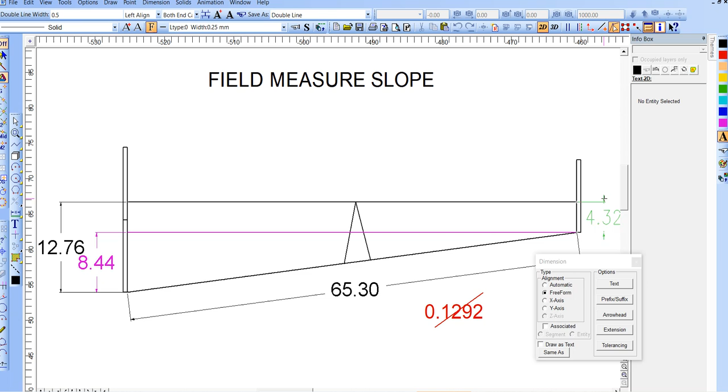This video is gonna show you how to measure slopes. Typically, you're gonna set up a builder's level. You'll put a Philadelphia rod here and a Philadelphia rod here, so you can measure the difference, right? For example, so ultimately, we're looking for this angle right here. Right, and we're going to be looking for it in slope, not degrees, maybe.

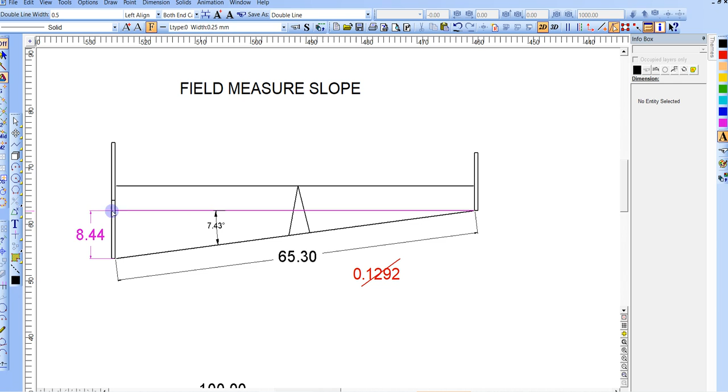All right, so you're going to have a Philadelphia rod measurement there and there. You're going to subtract them, and that's going to give you the 8.44. So this minus this will give you this. Those kind of go away. They'll be in your book, but they go away. And now you have the rise and the diagonal. To get the slope, you need the rise divided by the horizontal. But rise divided by the run, not the rise divided by the diagonal.

So if you do that, the rise divided by the diagonal, you'll get 12.92%. That is not a correct answer. Not far off. For most dirt work, it's going to be fine. But to get an accurate slope, you're going to want to take the rise, which is 8.44, divided by the horizontal. So to get the horizontal, you're going to go square root,

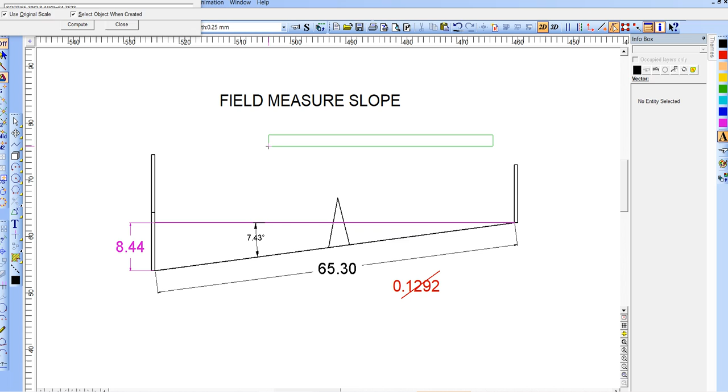open parenthesis, 65.30 squared minus 8.44 squared, close parenthesis. That will give us, I did something wrong, square root, open, 65.30 squared minus 8.44 squared, close parenthesis. Copy that. And then Control V equals, all right, that'll give you this horizontal here.

Now you can do the slope. So 8.44 divided by, Control C, compute, Control V equals, Control C. All right, that's how you get that slope. The proper slope is 13.03. That is a good one. This is not. It's not a huge difference though. It's looking like 13.03, almost a tenth of a degree, which for dirt work is going to be close enough.

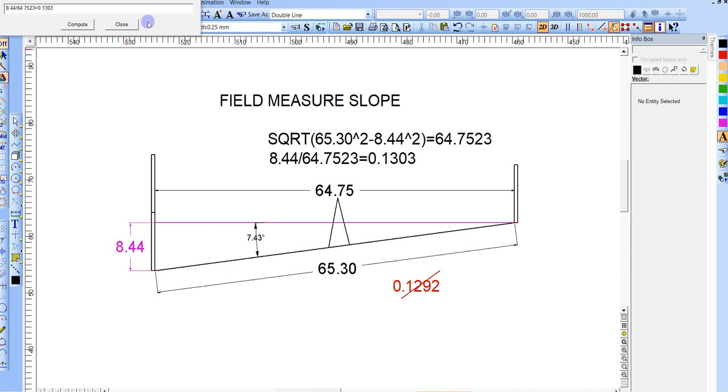So let's look at this then. All right, so that's one way. Here's another way. I was just explaining so I'll do that again, trim that out. All right.

So this is kind of an arbitrary location, so we don't know the distance between this, right? We just have a line right here that we know is at 225 feet. And we're going to plumb down here, because this is where we want to know from this point to this point, what's the slope? So to do that, we're looking for this triangle here, right? So we know the diagonal. That's something that we can field measure.

We have this line here that's 225 feet. We're going to plumb up H, V. So when you make your measurement, you want it to be plumb, right? We come up with 18.56 and 3.48. So to do the subtraction again, 18.56 minus 3.48, and you'll get 15.08. So that's the number we're looking for. Get rid of this, get rid of that. Those are in your book. And that line's not really relevant anymore.

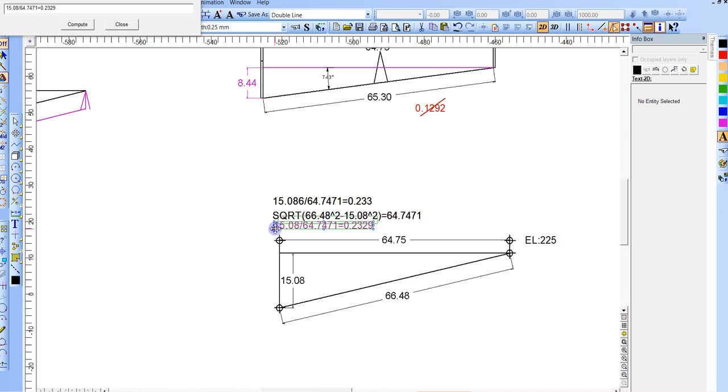23.29, right? And to check that, I want to show you why that is 23.29%. So if we click on this horizontal line and we make it 100 feet and we trim this, this will be 23.3, right? 23.29. I don't know why it's rounded up. Anyways, that's what we're looking for.

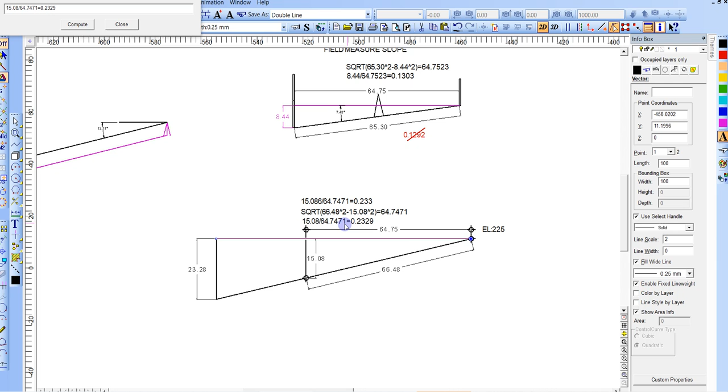23.29, 23.28. Ten thousandths off in the decimal, so something was rounded. That's why it works, because this is 100, right? 23.28 per 100, which is 23.28%.

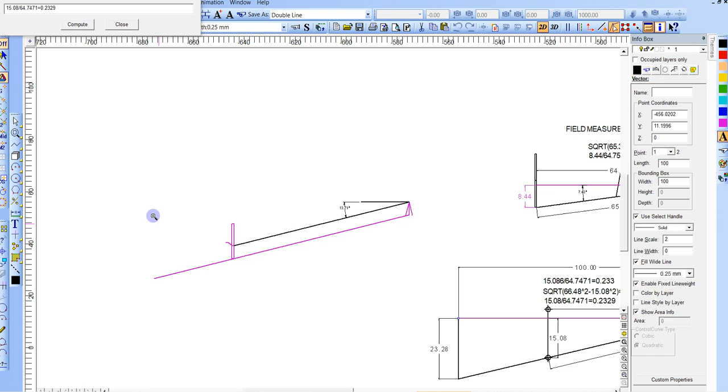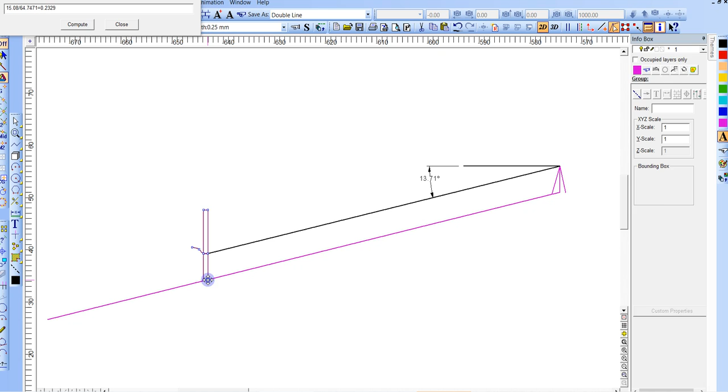Last technique here would be an Abney level or theodolite or total station, some other angle inclinometer. Inclinator, I think it's called, but you can call them inclinometers too. So the technique here is that this is at the same height as your eyepiece, or whatever part of the instrument you're working on, your eyeball if you're working with an Abney level. I looked that up a second ago.

That's an Abney level there. So you can see the horizontal bubble, and tip it down until you're on the eyesight. It splits the image. So one's looking at the eyepiece, the other looking at the horizontal bubble, and they give you the inclined angle. Now on some of the old ones, they'll have grade in feet per surveyor's chain and chain correction. I saw an old style one, I didn't recognize it, so I looked it up. Thought I'd share that.

And we want to go back to this. That's pretty much it. You just make sure that this ribbon or target that's on the rod is the same height as the eyepiece on the instrument or your eye if you're looking through an Abney level. And then it's a direct read for the inclined angle here. Here it's 13.7. So if you want percent, you've got to convert it. So you're going to go 13 degrees. So right off the bat, we got 13.

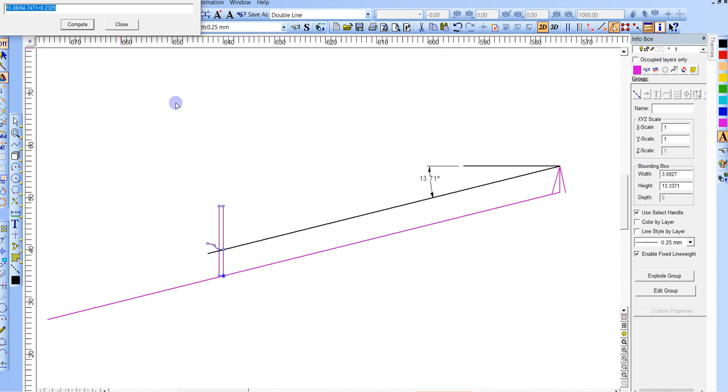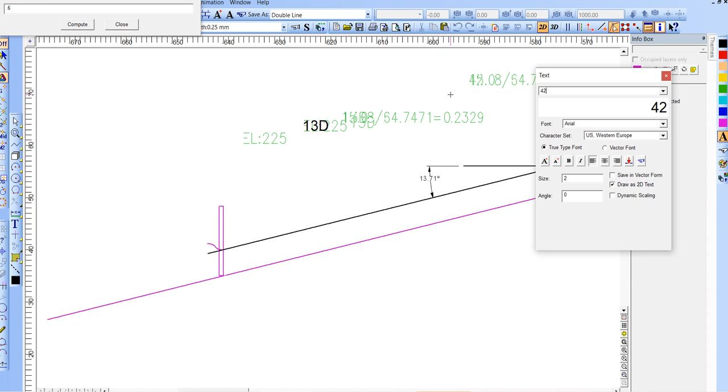And then you subtract 13.71, we subtract the 13. And then you multiply 0.71 times 60. Compute is 42. So 42 minutes. No, what am I looking for? We're looking for slope. Sorry. Went the wrong direction.

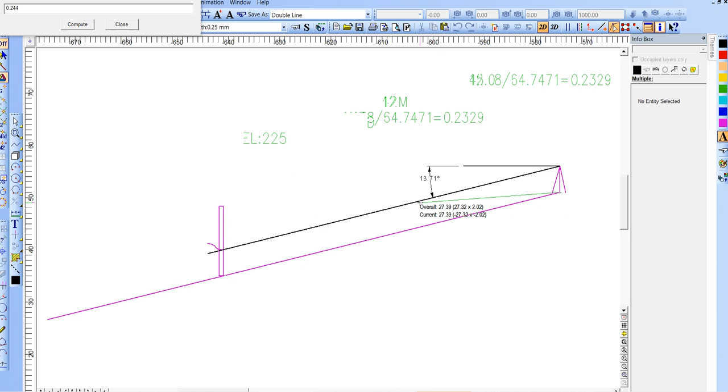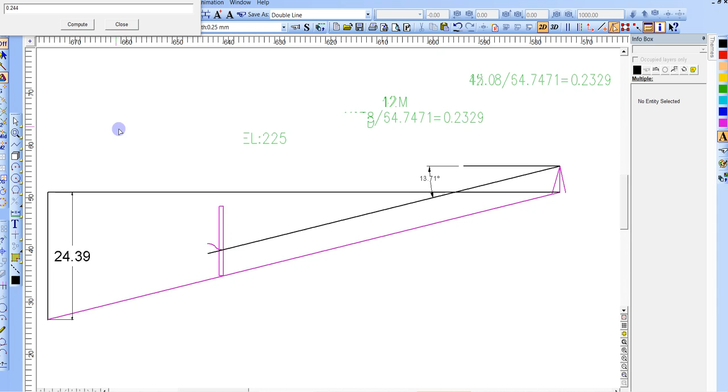Tangent, TAN, much simpler. 13.71, close parenthesis. That'll give us a 24.4%. Let's see if we did that. H, point relative, negative 100. H, trim. 24.4, right? So that's how you get that slope. Not sure if I made that clear. To convert the 13.71 degrees, you get the tangent of that.

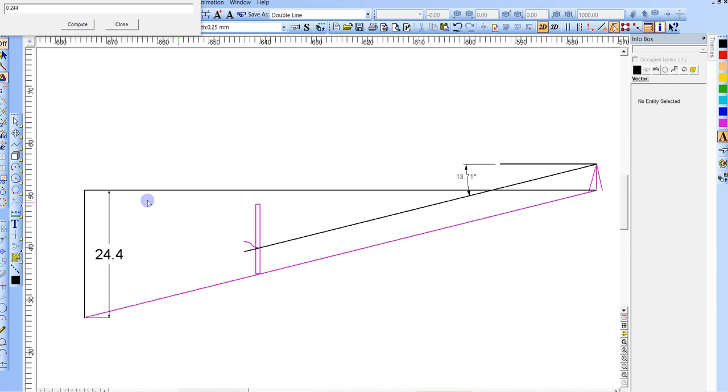We came out with 0.244, which is the same as this. 24.4%. So it matches up, and that's when we made that 100. That's odd. Thought I made that 100. Length is 100, right? Oh yeah, the wrong thing. That's it. So 24.4 per 100. You're just moving the decimal place to make it per 100, percent.

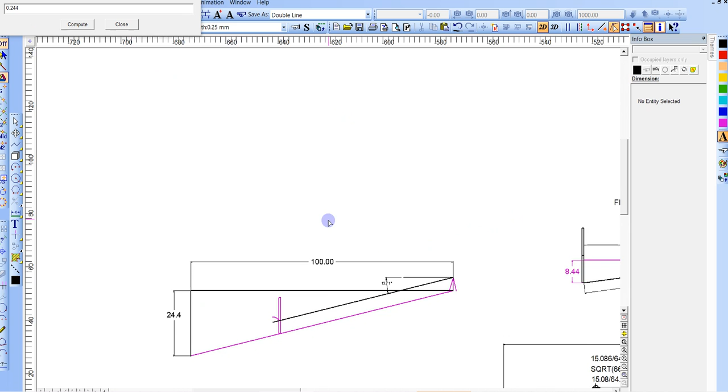Cent means 100. Hope that helps you in your career and helps you understand how to lay out slopes.